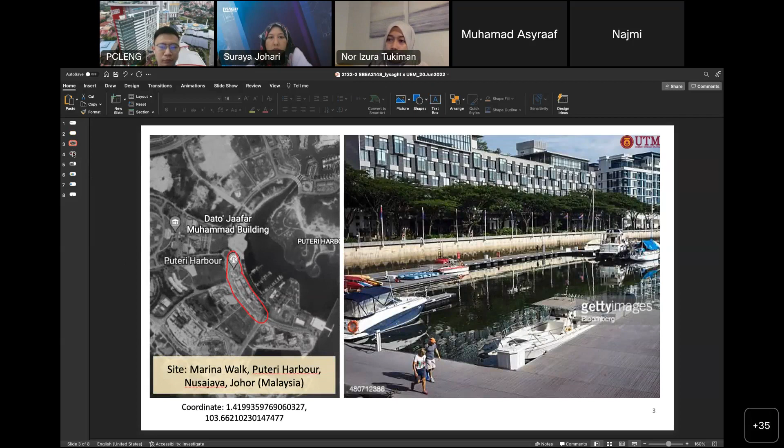And it also has this spacious paved walkway with all the big trees that I mentioned just now, and also some shops and sittings for the users to enjoy along this marina walk.

So basically the students are free to propose the location of their outdoor exhibition display along this marina walk. It's just a small project for the students to work out, and this is the basic form given to the students as their reference.

One of the requirements of this outdoor exhibition display is that it should be easy to assemble and disassemble for future use. On top of that, we also shared this standard dimension of exhibition display with the students as reference.

So they are free to basically explore and experiment with the design within the size given here, and as long as the display does not exceed the size of 2050 millimeter height and 2400 millimeter width, it should be okay. As part of the outcome of their proposal, they also have to produce working drawings or detailed drawings in order to explain the ideas and materials selection.

And then we also provide some links from the Lysaght Asia website for them to refer to all the materials that are available in Lysaght. And also we share the YouTube link, which is from our webinar last time.

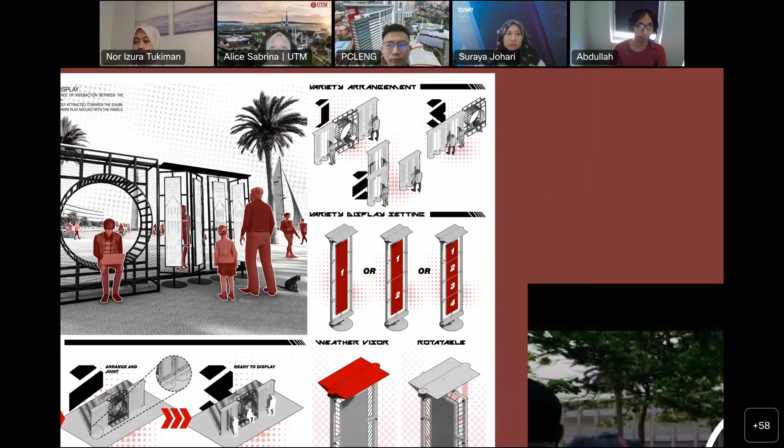So the design is very modular and flexible, with a variety of arrangements. This is arrangement 1, arrangement 2, and arrangement 3. The design is by unit, so you can mix and match it to create a variety of designs.

There's also a variety of display settings. The first design is one display, the second design is two displays, and the third design is four displays.

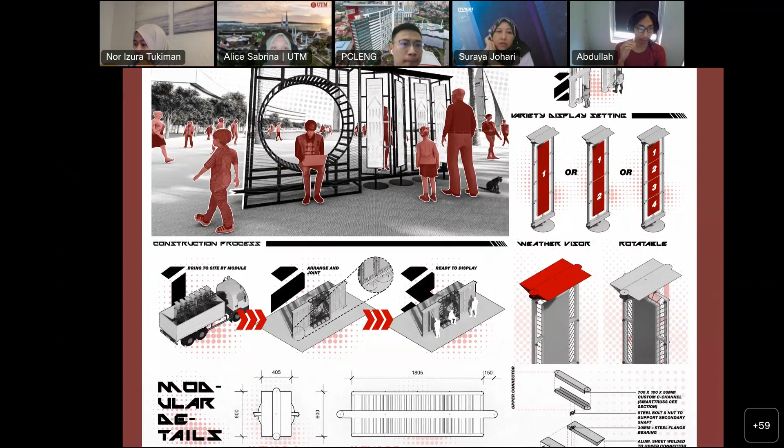For the construction process, every unit is already assembled at the factory. You can bring each unit, each display, to the site by module, then arrange and join it together, and it's ready to display. So it's a very straightforward construction.

The components include a weather visor, and it's also rotatable. The goal, as I said earlier, is to let the user interact with this display. By creating it as a rotatable display, we hope to let the user interact more with it.

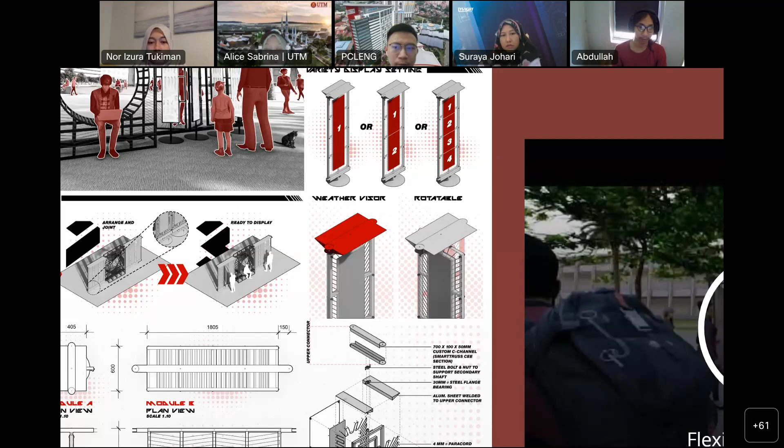Next, for the construction, I'll let my friend Rasyid present. Rasyid? Hello, can you hear me?

Yes. For the construction, the thickness of each panel is basically about 2 feet for the rotating panel. There are two types of connectors holding the panel, between the middle panel and the side panel. Can you go to the exploded structure, Lola?

The upper part is a custom C channel that will hold the structure to its partner. It's assembled using bolt and nut from the structure to what we call the connector at the side.

There's a steel flange bearing that holds the rotating panel, because steel flange bearing can hold the structure well since it is light enough. There's also an aluminum sheet welded to the upper connector that holds the frames.

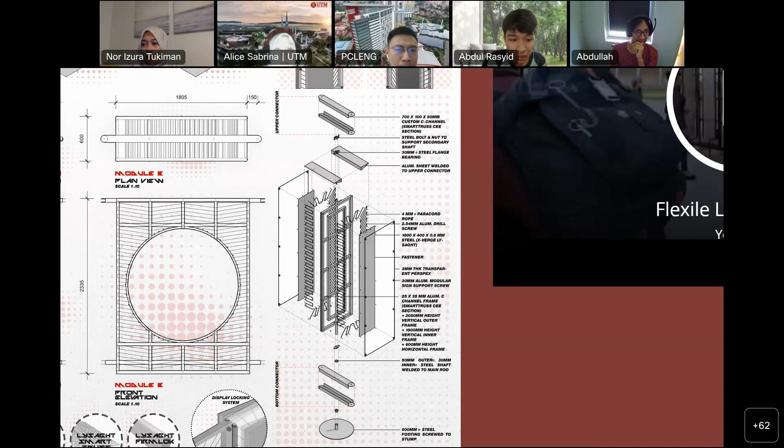Can I play a very short video for the panels to understand the design better? Sure, sure.

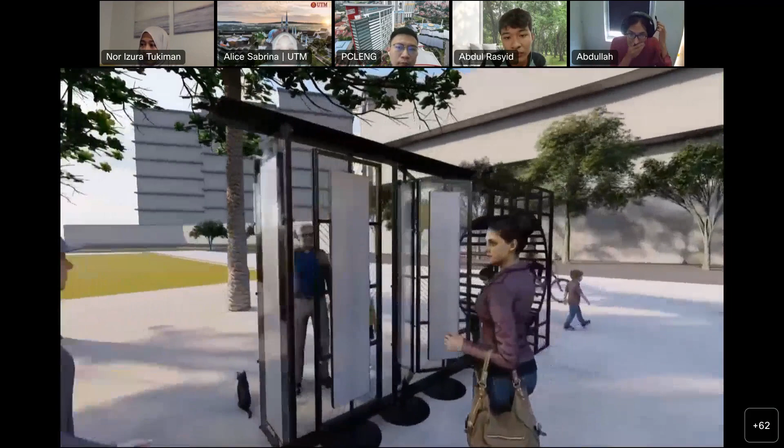Okay, I think that's all from us. Thank you very much, Abdullah, Rasyid, and the team. May I invite Madam Suraya to give some feedback or comments?

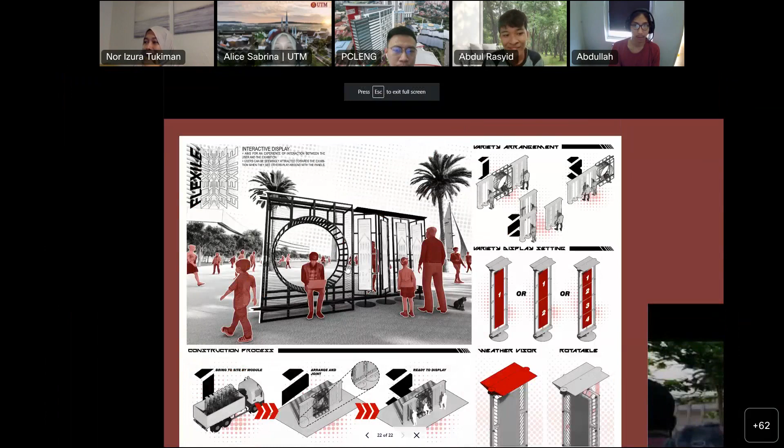First of all, good presentation. But can I know what your group is trying to solve here? Do you have any problem that you want to solve from your design? In terms of construction, is it? No, your concept.

I believe from the background that this research is to provide some facilities to the users, right? So are you trying to add more facilities? For example, you can see here, you can sit there and do your work. Is your design just to add some features, some hardscape to the environment here, or to try to solve any problems at this location?

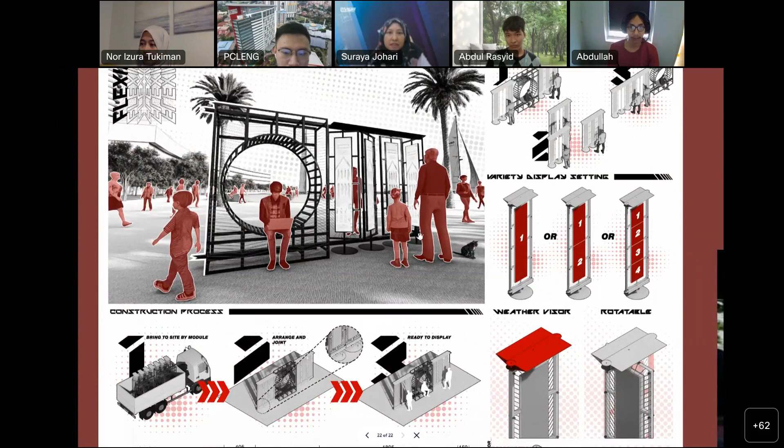When you talk about durability, have you studied how long? Because every product manufacturer has their own durability lifespan.

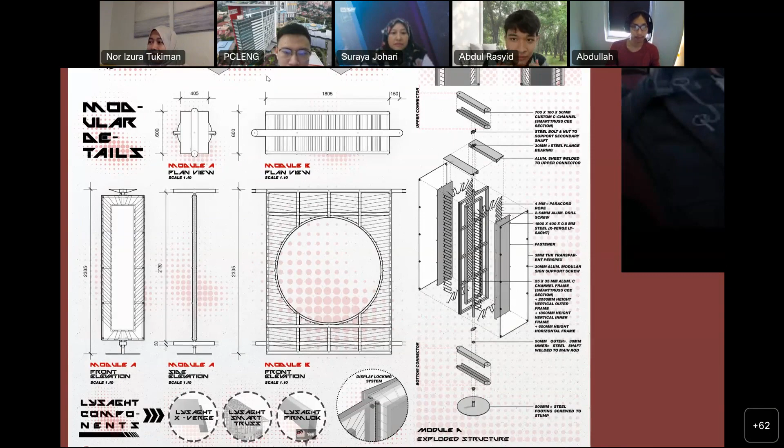Okay, thank you, Puan Suraya. Thank you very much, Madam Suraya. I think it's a very useful comment for the students, and hopefully the students will take note of all the aspects that have been highlighted for you to develop your design further.

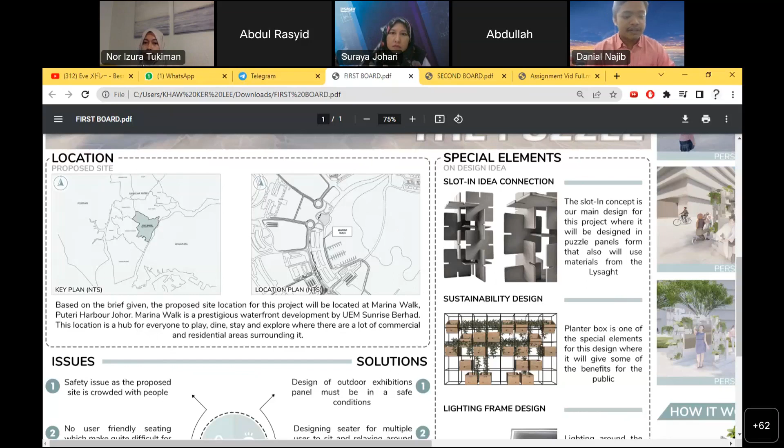So moving on to the issues and solutions on how to counter them. The first is safety issues, as the proposed site is crowded with people. The second is there are no user-friendly seatings, as the only seating area is limited to the benches and the side of the pier, which would be dangerous. The third would be bad odors caused by trash thrown around that has been neglected.

So the solutions for those three are: the first is that the design of outdoor exhibition panels must be in a safe condition so that it will not cause harm to other people. The second is designing a seater for multiple people to sit and relax around the marina walk. The third is placing planter boxes into the design to give fresh air and a sense of sustainability to the project.

So for our design concept, we took into account that Iskandar Puteri itself is like a big main board for a puzzle, an empty puzzle where you need to solve it, like those puzzle games. And Puteri Harbour is like the main development, the big puzzle piece for the board itself.

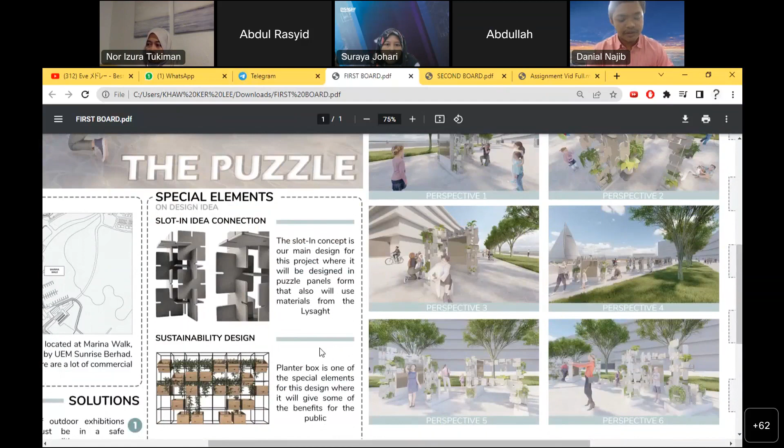Yes, okay, so moving on will be our special elements, which include the slot-in idea connections for the puzzles, done using Lysaght materials. The sustainable design is the planter boxes, and the third is a lighting frame design which will illuminate the display area to create a lighting effect and attract people to read it. Then moving on will be the design process.

So we took the design process from the sentence 'Marina Walk', where we play with perspective: from one view you can read 'Marina', and from another view you can read 'Walk'. That can be played around as a perspective and a way to attract people to our design. We first took the letter M and made it easy enough to construct, making it a bit blocky.

And also easy to construct. Then we changed it, applying some of the elements we had identified before, making it easier to read from one perspective. After that, we changed the base shape into puzzle panels so that it would be the main concept for the project.

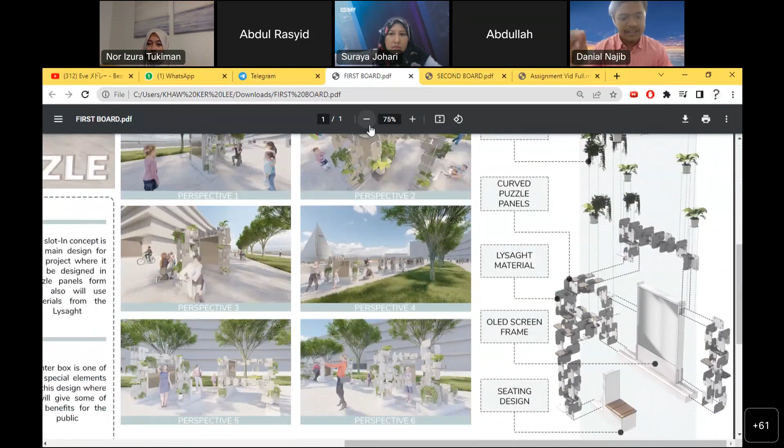Moving on will be the perspective renders and exploded axonometric, to see in detail how we constructed it, where the seating design is at the base with the OLED screen frames on the side of the design, in order to not block out the letters of the M, the A's, and such.

And then the curved puzzle panels, in order to resolve that safety issue. Also the planter boxes, which we put on top of the curved puzzle panels. Moving on would be...

How it works: the planter boxes act as the sustainable design, and the design seat is combined directly into the design to help the public take a rest while also being able to read the display on the left and right. The puzzle panels' main shape will be curved for safety, and the lighting will provide good illumination.

So moving on will be the second board, which will be our drawing.

You can see from the plan view and the elevations. On the front elevation, you can distinctly see the letter M. We tried to do that for the other letters, the A and the R's, and such, where you can also see the word 'walk' on the right side of the design itself.

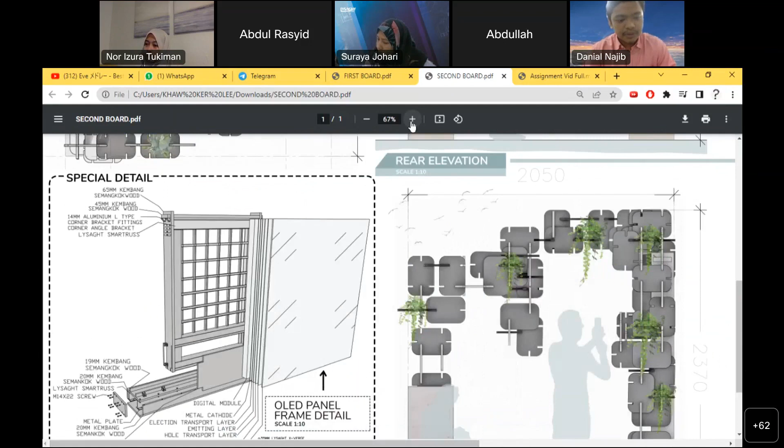And then after that will be the details. For details, we put two: the OLED panels, the frame details, where we use more wood, and also the Lysaght materials, using smart trusses. And then there will be wiring, screws, and so on.

After that, there are the puzzle panels, where we use wood in the middle of the panel and also Lysaght X-verge, all put together by screws. When slotting in, there will also be brackets, in order to not make it fall apart easily.

So next up will be our video of how this design was actually done from beginning to end. Enjoy.

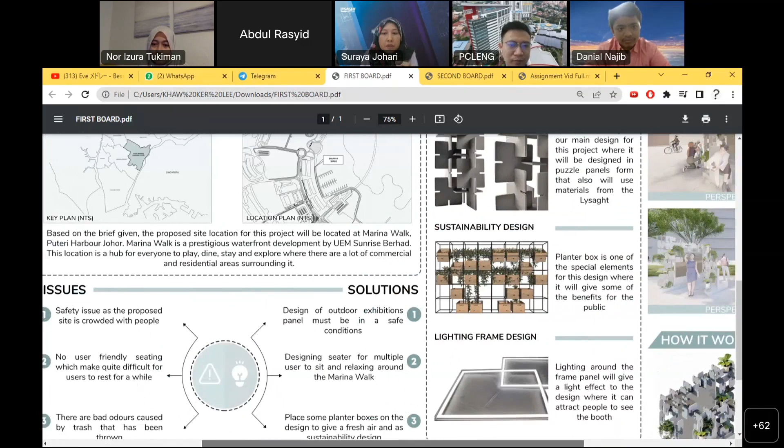I want to know how you are going to construct this, the material that they are using for the planter box. You have a planter box, and then you have your seating, you have display. Why are you choosing all these materials? The main factors affecting your material.

Are you saying something? That point will be given by one of my team members, Balkis. Why we choose the material, kembang semangkok wood, because it has good density, and also it is easy to resaw and crosscut despite its reputation as a difficult timber to process. It also has natural durability - the timber is moderately durable under exposed conditions.

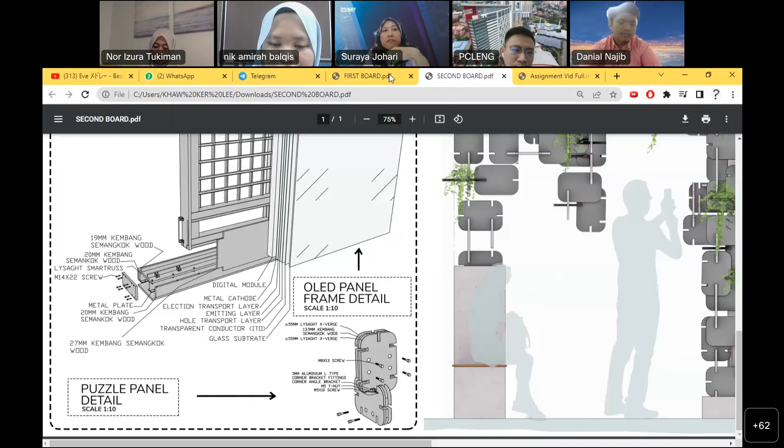My concern is about safety. It's good that you have the idea to conceal the wiring into this C section so it can be covered up. But in terms of maintenance and safety during rainy days, we need to ensure the wiring won't trip, and also how difficult it would be to maintain this wiring.

And then, for all these small panels, what kind of information do you intend to have displayed?

Is it just panels for decoration, or are you going to have some information on it? Hello, Madam, other than Suraya... planter box?

Hello. Yeah, okay, all right. So can I add on something? Sure. Our initial idea is we have two elevations, front and back elevation. We have the panel with the same color, but different material of Lysaght Bluescope materials. And at the right side and left side, we have another color, but also different material of Lysaght Bluescope materials.

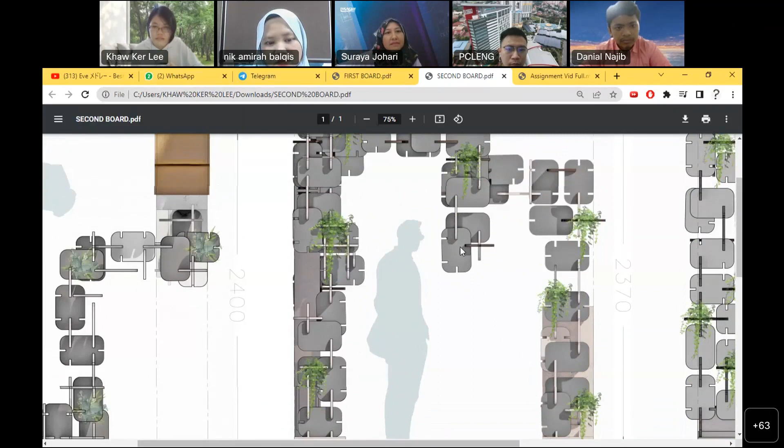It's okay, all right. I think you have a good design, but if you can add some informative articles, other than our products, it would be more meaningful. Okay, so...

The conclusion for this second idea presentation: please have a look at the safety in terms of the wiring, and also the informative things you can develop into your design, because your design is, to me, very good, very interesting.

The thing is, if I go to this park or walk through this lane, I need to go further to see your letters. If I stand about 1 feet from this display, I can see this letter. So how are you going to tell people that this is actually an M, for example, because of course I need to step further away to see the overall letter?

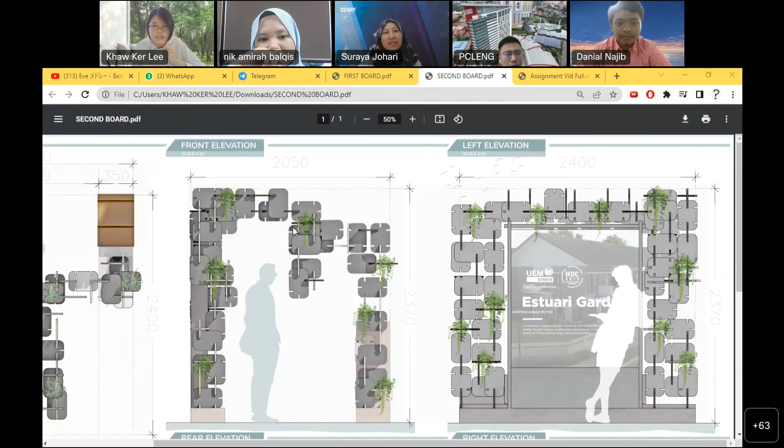Okay? All right, madam, I think we can use color to highlight it, right? Yes, maybe. Madam, can I ask another question? For the display screen, is it possible to use solar panels for the display? Is it possible, or do we still need to think about how the wiring connects?

Even with a solar panel, you need something. Solar panel is doable also. Yeah, but what for? Why do you want that solar panel in this design? We didn't want to have the transfer wiring for the power. Okay, you're collecting the solar, yes, but what for? Are you trying to generate something?

Are you trying to generate the energy for the display? Yeah, okay, because the wiring is very difficult to think about for that. I'm not saying it is impossible to do it, just you have to think about how to properly protect it.

Okay, all right. Thank you, madam. I think we still need further development. Sure, okay. Thank you, madam. Thank you, madam. Right, thank you, students, and thank you, Madam Suraya. Okay, shall we move to the third one?

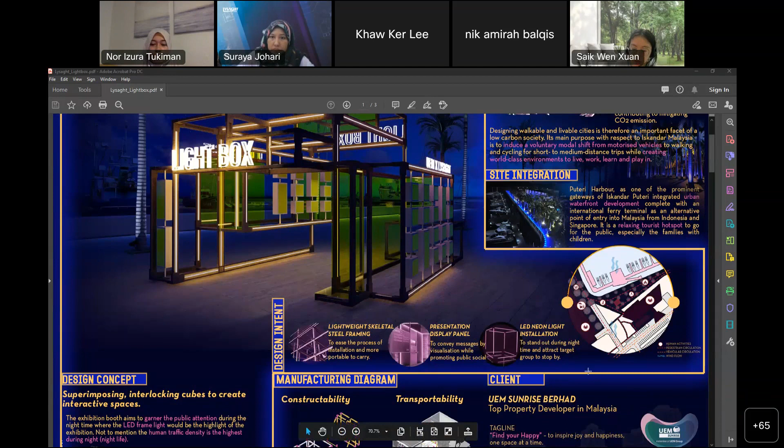The design intent for this Light Box comes from three main elements: the lightweight skeletal steel framing, which eases the installation process and makes it more portable to carry; a menu presentation display panel to convey the message through visualization while promoting public social interaction; and the LED neon light installation so it can stand out at night and attract the target group to stop by and appreciate the structure.

So what is the design concept? The design concept uses superimposing and interlocking cubes to create an interactive space. This exhibition booth aims to garner public attention during the night time, where the LED frame light will be the highlight of this exhibition, given that human traffic density is highest at night.

The concept of modularity provides flexibility and creates diverse configurations. This is just one module, which has a lot of possibilities for the future. It may seem bigger compared to other groups because we have a main frame with many possibilities for creating a variety of shapes and combinations.

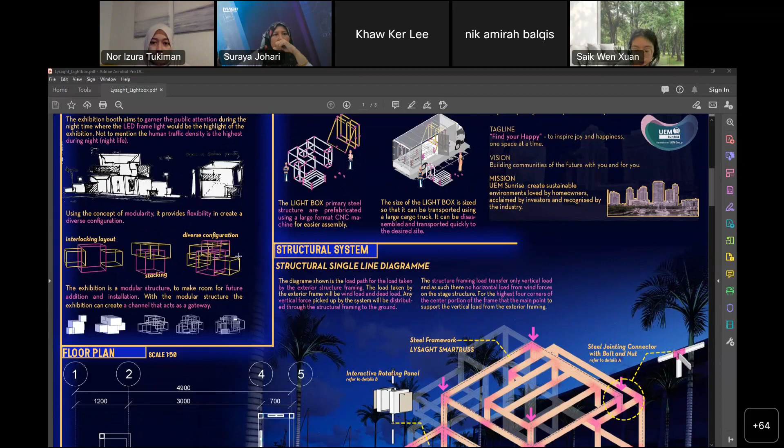We use an interlocking layout and stacking effect to create diverse configurations. The exhibition is a modular structure, making room for future additions and installations, and it can create a channel that acts as a gateway—like the concept of Lego, where stacking up all the cubes creates a gateway structure.

Looking at this floor plan, you can see the walkway is about 3 meters. It's 3 meters because we want the place to be comfortable for people—when someone is standing beside it reading the information panel, there's still space for people to walk by.

Besides the walkway, there will be interactive spaces, which are also a highlight—this interactive rotating panel. I will explain this further in the poster.

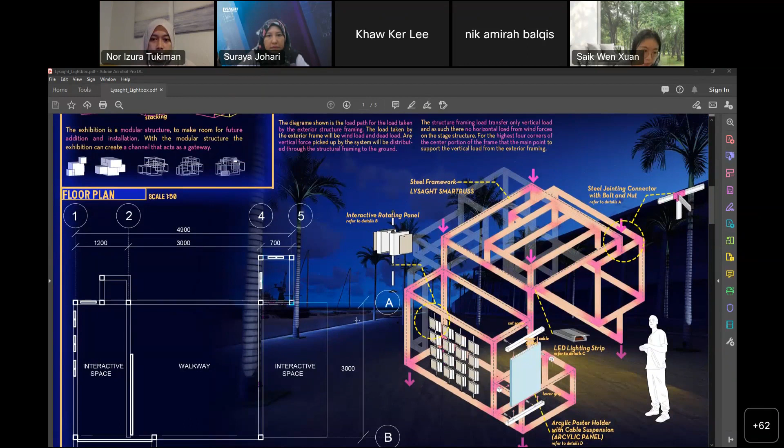So how is the manufacturing diagram done? Firstly, in terms of constructability, the Light Box primary steel structure fabricated using a large format CNC machine for easier assembly.

Secondly, regarding how it can be transported and its size: it can be transported using a large cargo truck, and it can be disassembled and transported quickly to the desired site.

So how about the structural system? This diagram shows the structural single line diagram, showing the load path for the load taken by the exterior structural framing. The load taken by the exterior frame will be the wind load and the dead load, as shown by the arrows here.

The vertical force picked up by the system is distributed through the structural framing to the ground. The structural framing transfers only vertical load, as we have removed the horizontal load from the wind force on the stage structure. The highest four corners of the center portion of the frame will be the main points supporting the vertical load from the exterior framing.

Okay, so our structure will be 4 highlighted details. First, we are using the steel framework. We are using the Lysaght Smart Truss, and a connector with bolts and nuts, and we will refer to detail A in the poster later.

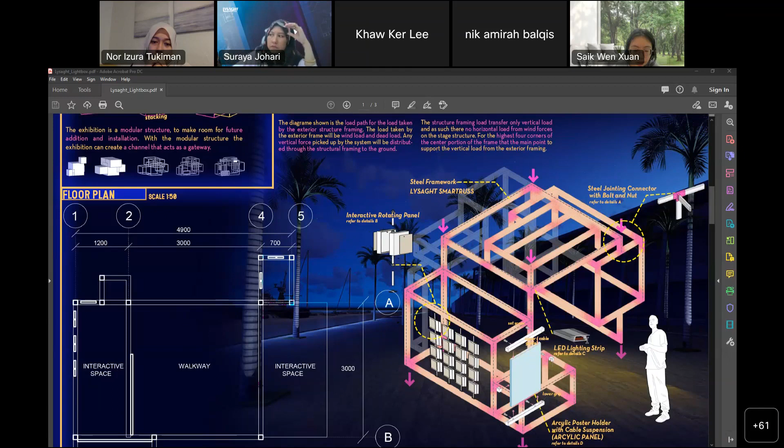Thirdly, the focus will be the LED lighting strip, because we want to integrate well with the surroundings. The LED is a main highlight, so it can function and be a highlight at night to attract people to the structure. It's connected by suspension - how did we connect with the structure? And the poster and information are placed inside the acrylic panel.

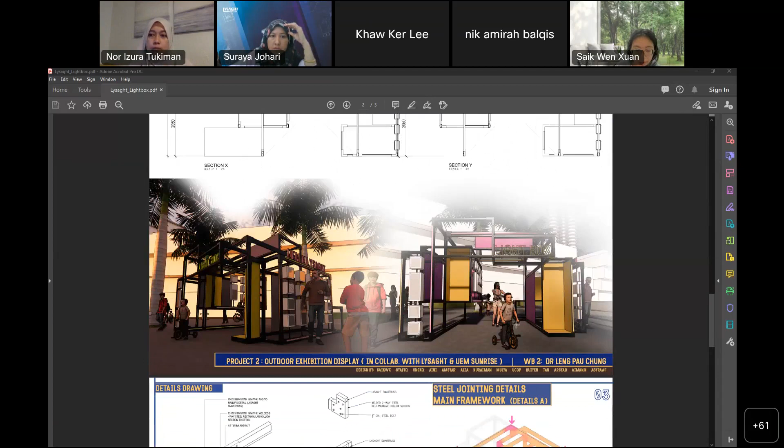During afternoon or morning, you can see this was especially made for the interaction of the children and of the public.

So for the details drawing, detail A will be the steel jointing details. We are using the Lysaght Smart Truss as the main structure. For the connection, we are using bolts and nuts with connectors, connected with steel bolts - you can see the details here. There are a lot of different types of jointing, but still using the same type of connection, the bolt and nut, and using welded connections.

Okay, so second will be the pivot structure details, which is for the interactive rotation panel. So this is the detail. We are using 6mm acrylic perspex for the informative poster inside, and it can be rotated to 2 sides. It is supported by a steel round tube.

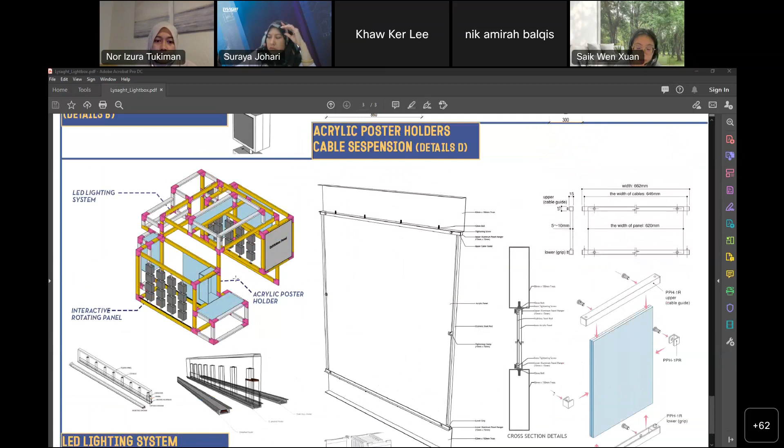This overall diagram shows how not all of the structure has LED, but we have selected some portions that link the LEDs together, creating an interlocking effect and visual for the public. So you can see here how the LED will be placed - we're having the idea to put the LED strip at the C channel, covered by a plastic panel, something like this.

And we will connect it all to a box, and it will be hidden in some way for safety reasons. Yeah, so the last detail will be the acrylic poster holder.

So how it is connected to the steel is by using the cable suspension. This is some of the details - these are the trusses. And then the cable suspension holds the panel itself, so the information poster can be inserted between this acrylic panel. I think that's all for our presentation. Thank you.

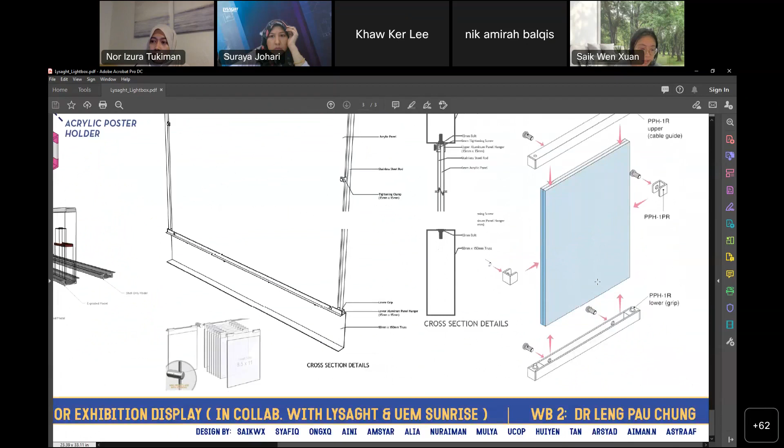Right. Thank you so much, again very good presentation. You highlighted the low carbon society blueprint and so on, you addressed it well. Okay, and the first thing that I would like to do is congratulate you.

It's a good job in presenting the load path. You have the dead load and live load, how it's being transferred.

Okay, maybe I missed out just now. Can you explain to me why you chose a roofing structure without a roof for your design? Without roofing? Okay, right, no roof at all?

Firstly, from my point of view, why we are not having any roofing is because this structure's main intention is just to create interactive spaces and display booths for others. This is not our main intention to provide shading or shelter to people. We just want the structure to be connected like a gateway, more like a structure to appreciate, creating a place to attract people to come. So for the roofing, it is not our main intention, because we don't intend for people to sit inside and rest, but instead we just want people to walk by.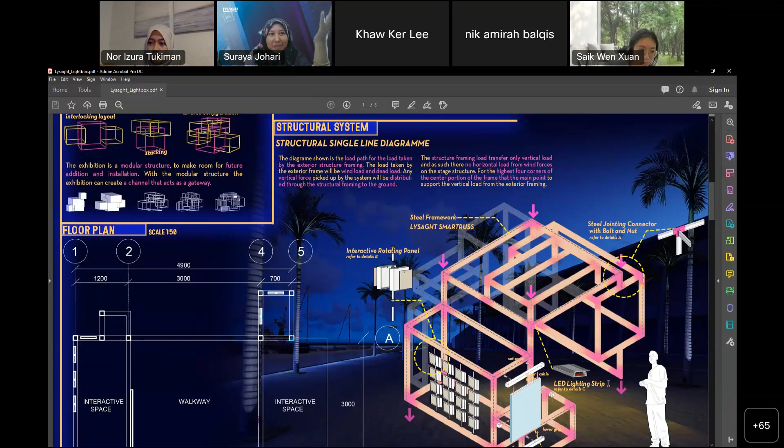All right, so with our weather we have hot sun and rainy days. You have a lot of things to display, a lot of things to attract people to be there and browse through your information. Do you think people would like to go there without any shade? How are you going to attract people? We know that people will feel uncomfortable with the hot sun, so how do you attract people to go to your display area and let them browse and enjoy the information you are providing here?

Put simply, when you are waiting for a bus, how long can you stand there to wait for your bus without shelter?

Understand. Okay, maybe this is a suggestion: the purpose of the roofing is not only for shelter, but also can be additional maintenance protection. You can add it since you have a lot of connections, so maybe you can use this to minimize the maintenance requirement.

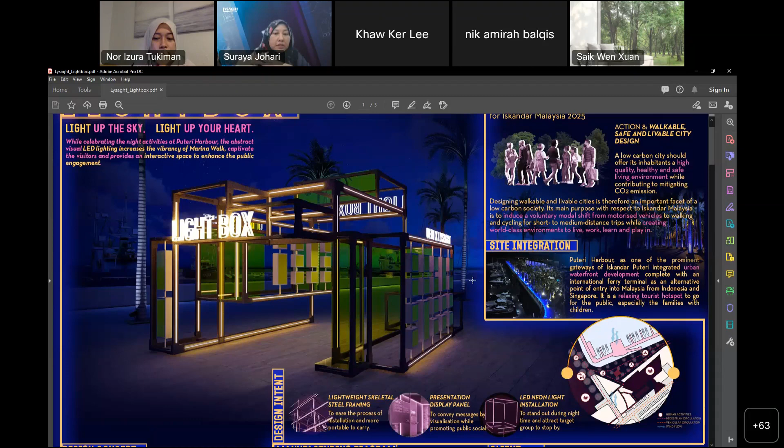Okay, and then just now you were saying that you have welding connections, right? Which part requires welding connection? Because most of our product components, the truss component, the roofing, the thickness is only up to 1.2, so it's impossible to have welding connection. So I would like to know which part you are going to apply welded connection.

Sorry, let me go through the details. For the welded connection, is it necessary if we are having connectors for the steel? Is it necessary if we're having bolt and nut, so it's not necessary to weld together? That's why I'm asking about your proposal for welded connection, can I know which part has that welded connection? Oh, maybe at the ground, maybe the base plate. But if we can avoid it, then avoid it, because the base plate is the main connection to the ground.

That side might be okay, but I have to look at your main components. Your main components are actually C channel as well, right? Yes. So if it's channel, we don't have that welded connection, because welding is not suitable for thin wall plate.

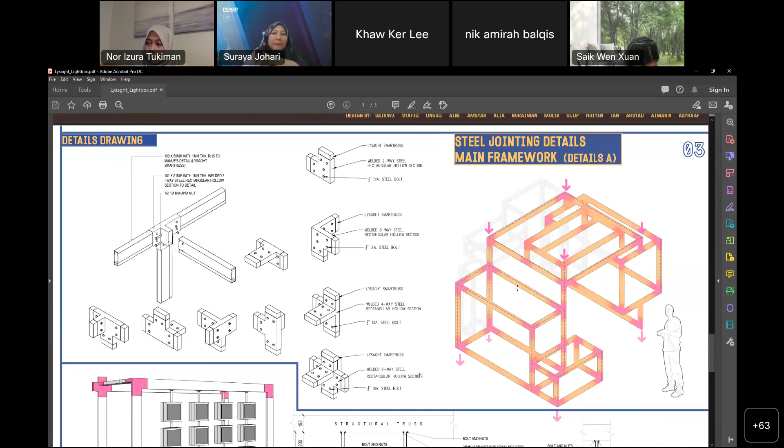I see, all right. And the connection you are creating now, do you have an idea how to connect between the junction and everything? Maybe we can have another discussion to have a simplified connection, and also the spacing of your studs, the spacing of your vertical members, and so on.

Again, my general comment would be, since this is a public space open to everyone, what is your prevention for vandalism and for safety? I guess you need to improve on that as well. All right, thank you, madam.

And for acrylic materials, we use acrylic a lot, and we found that acrylic tends to fade earlier. So how are you going to overcome this? For the acrylic panel, is it? The one that we have is actually indoor. Even indoor, it's easily faded. We can see signs of fading about 1 or 2 years in, and it affects the material sandwiched between the acrylic. We can see discoloration on the panel itself.

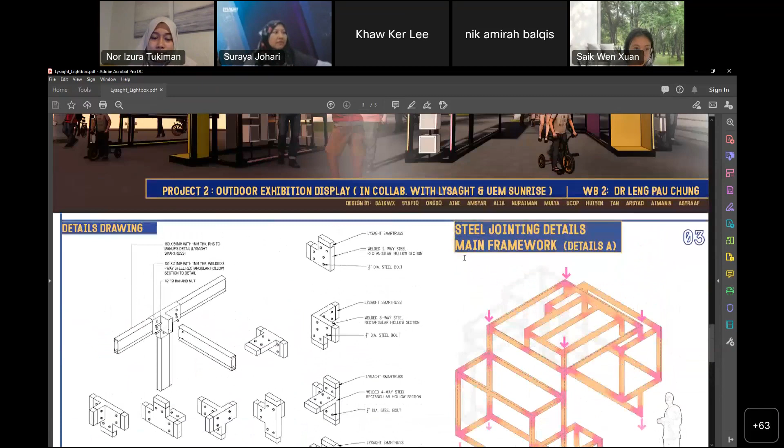Hi madam, can you hear me? Yes. Hello, I would like to explain about the welded part now. Actually the welded part is only at the jointing connector. So the main structure, which is the Smartruss, just slots into the rectangular hollow section, and is secured with bolt and nut. I think that's all from me.

Oh okay, so you are building a connection, constructing a connection there - welded 3-way steel rectangular, wow. Yes. You're using hollow? Rectangular. Initially we were thinking of using Lysaght materials of the firm lock, but we heard that it's not available in Malaysia, so we changed into these C channel materials. Okay, good idea to have this considered, a socket for all the junctions.

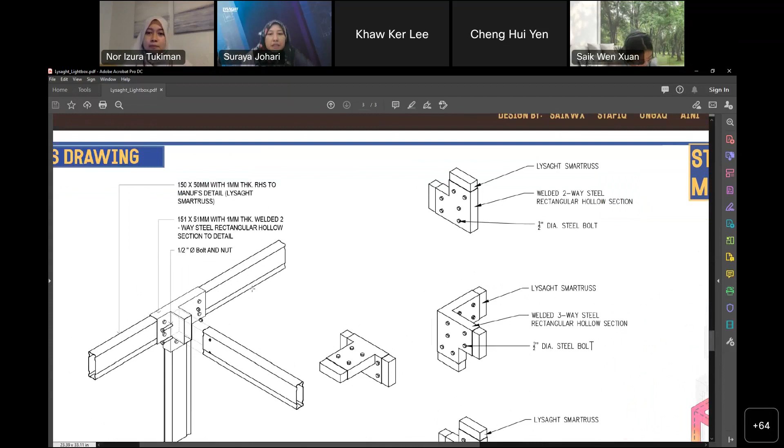Okay good, but if we have a simplified connection, I think we can avoid unnecessary work - for example, having a new socket for this connection. But honestly this is a very good idea because you are solving the connection problems here. Right? Okay, thank you madam.

Any other questions from your group, Wen Xuan? Yeah, any others? Just one more - just want to ask, what is the maximum span for the length if we are using these Lysaght materials for the Smartruss. Is it possible for this to be 3 meters, or where is it?

Oh sorry, here - not possible. Not possible, you mean? So you have decreased the length? Decrease the length, or you provide internal support - for example, maybe you can add on vertical members in between the span, so that vertical members can be part of your display unit later for the rotating acrylic.

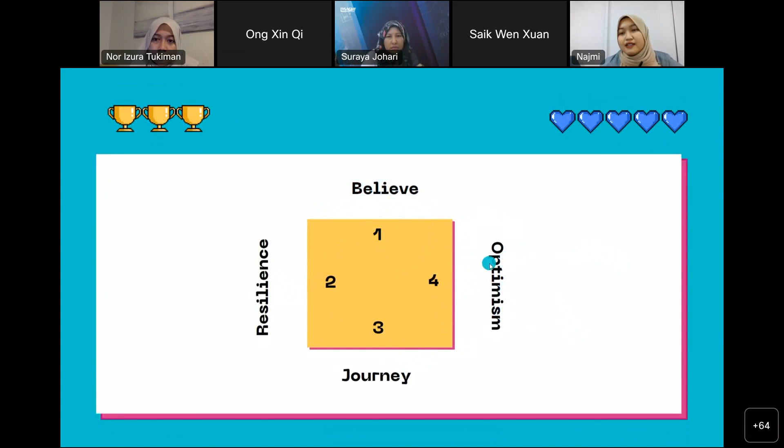For the ideation, we are actually inspired by UEM Sunrise's slogan, 'Find Your Happy.' In the tagline, they have a few elements of happiness, which are: first, signifying belief; second, resilience, journey, and optimism. This is from the UEM slogan. So what else has four sides? That is a pixel. So this becomes our concept, Find Your Pixel.

Pixel is the basic component of our exhibition display, and this pixel is a modular and movable component which enables users to create their own element of happiness. Like we mentioned, UEM has their own element of happiness, and for our exhibition display, we let users assemble the pixels according to their likings.

For our design objective, we intend to design an interactive pixel display with push and pull movement, some extrusion in our design, and a personalization option. It is a modular design that can be personalized and easy to assemble, something like a Lego. We are able to push and pull the pixels from the structure.

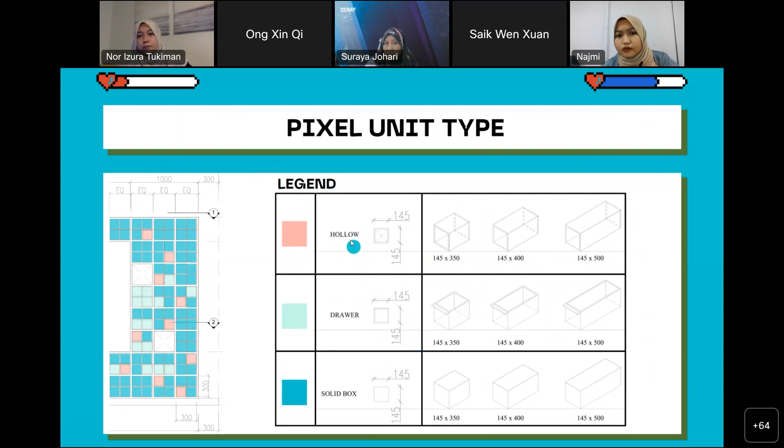The dimensions are as such: 145 by 350, 145 by 400, and 145 by 500. Each type has similar sizes, just different details. For the drawers, we can use them to put brochures, as well as the hollows.

So about the different sizes of the pixel units, we can create the extruded look. From this first plan, we covered the top with Lysaght panel, and then this is again the pixel box, and also this is the base. The second plan shows the section in the middle to show how the LED sits between the pixels.

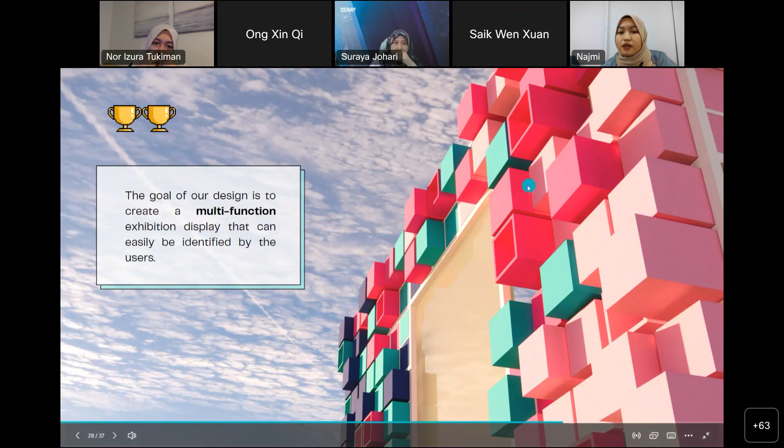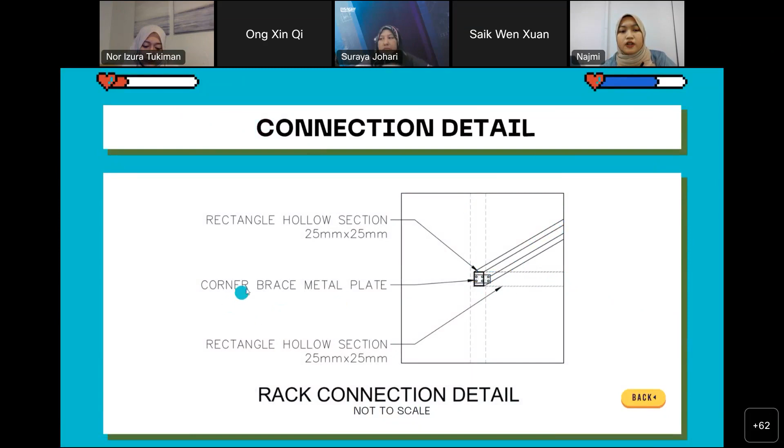Let's see. The next one is the rack connection detail, for the corner connection. We are using a corner brace metal plate. Very simple structure.

Just only a steel plate that is connected by tanggam.

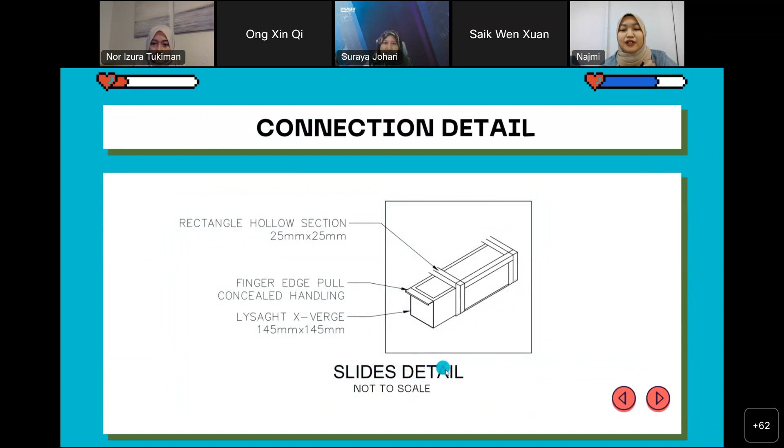Okay, lastly is the sliding detail. Like we mentioned, we have some push and pull things happening in our exhibition. So this is a finger edge pull conceal handle for users to push and pull the box to take out the brochures and everything.

Okay, I guess that's all for the presentation. We can proceed to the input, feedback, I guess. Okay.

Thank you, I already put my attention to your design. One problem with me is if I'm touching the X-Verge panel to pull out the box, would it be very hot? It will be very hot. So how, if I am the user, how am I going to pull that? Because that's the main problem, that I won't touch it because I know it is metal, and metal will absorb heat very fast.

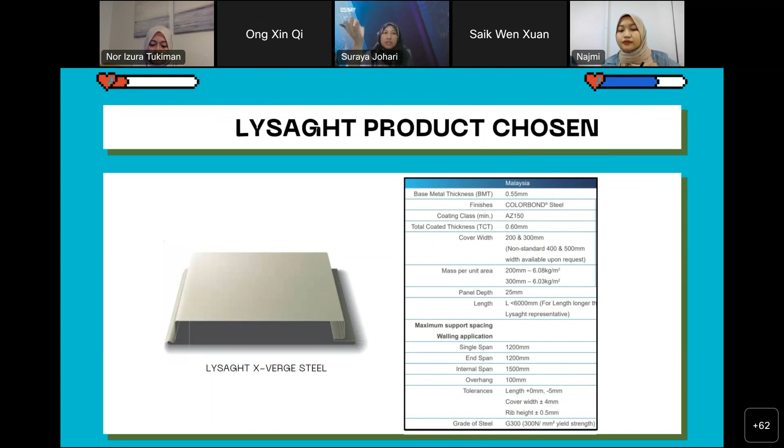Would you mind changing the handle to another product or other material? Because I think there's no issue for that. We can just please look for users' comfort. Yeah, because it's for sure with your exposed display unit, this material will easily absorb heat very fast.

And why did you choose your structure using mild steel? You are going to use a hollow section, right? Yeah, so the hollow will be fabricated using what kind of material? The main structure. Steel RHS, so it is mild steel, right? Yes, true. So why did you choose mild steel instead of using cold form C-channel?

Hello, okay, yep. For that question, we just wanted to use steel for our main structure. Any reason for that?

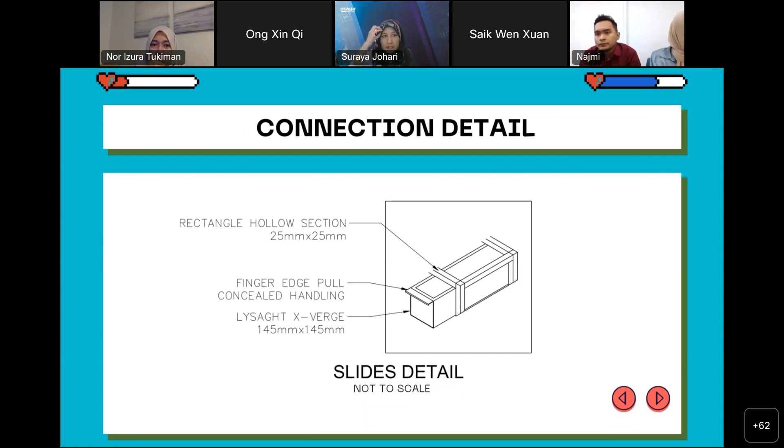So what is your concern actually? The stability, the strength of the materials? Yes, and also the looks of the overall design. Okay, by using cold form, you can achieve your desired looks, your desired design. We actually already considered the C-channel form.

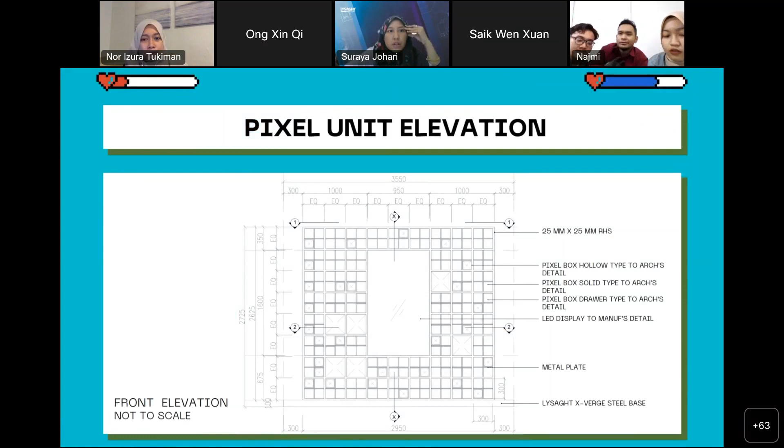Yes, what about the base? You're only using this X-Verge for the base. It is actually a concealed structure, the Lysaght is part of the structure for the base. So the base will be folded? No, not folded.

So basically the view from the plan is that we put the Lysaght material on top of the base for the Lysaght X-Verge, not on the sides. On the elevation, that is covered, just to indicate that we use Lysaght X-Verge. All right, so you will cover the entire ground area with the X-Verge. Yes, because the X-Verge has a connection, a seamless connection, so I think it's appropriate to use it like that.

All right, so people will stand on that area, right, on the X-Verge? No, it's not to be stepped on, it's more for holding the structure on top.

Okay, what is your arm length? Is it reachable if I stand one meter out? And how about kids, a bit shorter? There's no way you can prevent people from stepping on the ground area.

So I suggest you consider different materials, because it's very flat. I see, if it's rainy season and there's water, this could chain up problems.

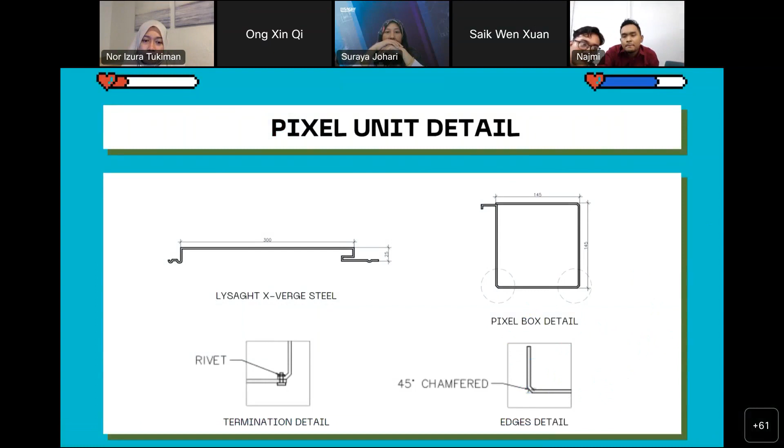Should we consider just how you are going to fillet this, bend this to make it a box? How are you going to fabricate this shape? By bending it.

Okay, so then what is the rivet for? The rivet is for terminating the endings of the pixel box detail. So we considered using a flush rivet, which will not disrupt the flow of the drawer, so it'll be smooth when pulled.

Oh okay, all right. But I think the lapping area is not sufficient, it's just barely enough, I think you need to enlarge it a bit. I see, okay, we need to enlarge it a bit. Okay.

For the entire box we'll be using X-Verge... Can you consider, because we have a lot of profiles, maybe using a few profiles instead of just one profile for your box? Yes, because we want to achieve that seamless look, so we only look for a profile that has a panel with a seamless profile. Okay, so you already have your scope. Okay, all right.

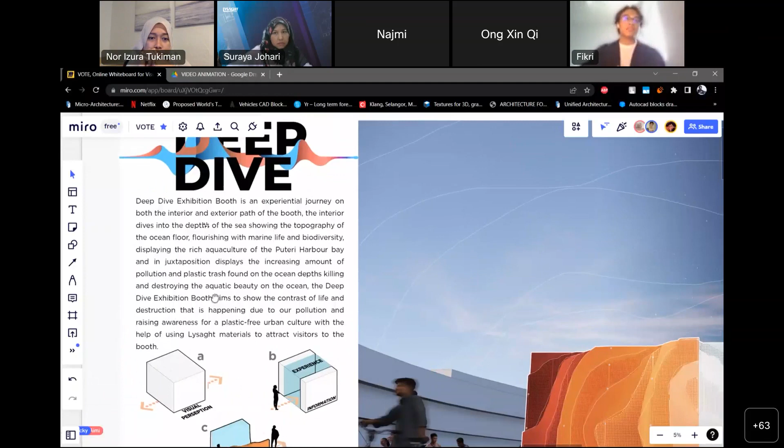The Deep Dive exhibitional booth is an experiential journey on both the interior and exterior parts of the booth. The interior will dive into the depths of the sea, showing the topography of the ocean, flourishing with marine life and biodiversity, displaying the rich aquaculture of Puteri Harbour Bay, and in juxtaposition, displays the increasing amount of pollution and plastic trash found in the ocean that's killing and destroying the aquatic beauty of the ocean.

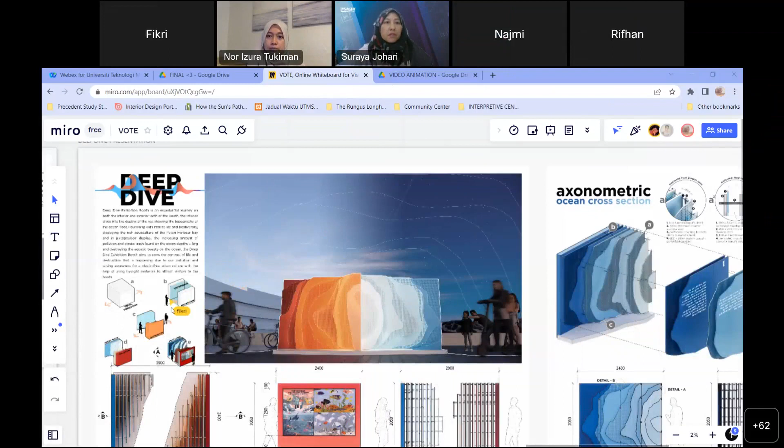Continue with the form idea. So after creating an experience through the past, we create a juxtaposition displaying contrast between the ocean floor and the amount of plastic on the boat.

So we show the render. In the render you can see one of the ways this exhibition contrasts the elements. So when you look at the floor plan, you can see the actual path and how it contrasts with the plastic pollution, so people can see how each element affects us.

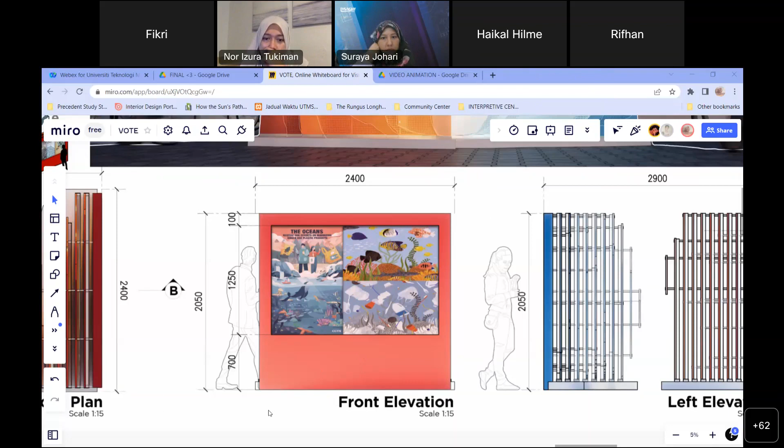So on the front elevation, you can see that we prepared a space for the display, an opportunity for poster displays to show awareness for plastic pollution. On the left elevation, the next one, you can see the intricate layers of each individual piece of the panel showing different depths of the ocean. So moving next, we go to the next section, Section A.

So section A is where you can see the topography of the ocean, showing the depths and detailed marine life and biodiversity on each level. On the other side is section B, where you can see the detail of each layer.

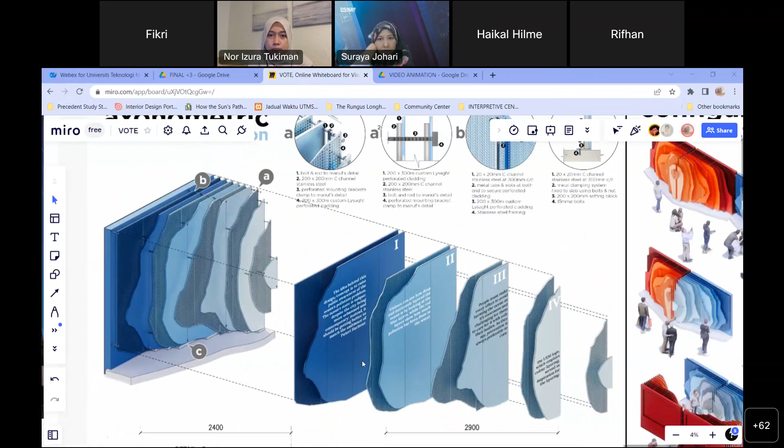When we look at the exploded axonometry of the ocean floor cross-section, it is displayed on every level what type of marine life exists on each and every level. So the idea behind this design is to raise public awareness for the ocean pollution problem.

The ocean state is subpar, and despite the city being more urbanized and contemporary, it should be getting better and match the ambience of the Puteri Harbour area.

Visitors can see how deep and intricately layered the ocean is by looking at the blue layers, while the red layer shows how much pollution has done to the water.

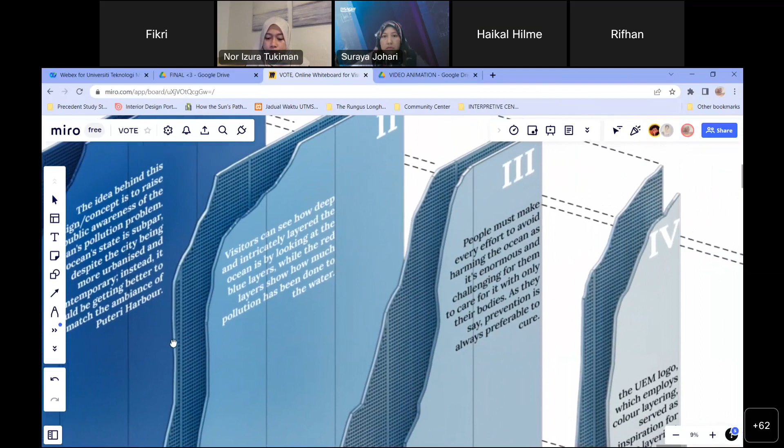People must take every effort to avoid harming the ocean. It is enormous and challenging for them to care for it with only their bodies. As they say, prevention is always preferable to the cure. The UEM logo, which employs color layering, serves as inspiration for the layering.

So we'll zoom out and go to the construction. First, the horizontal steel bracket joint. Each layer is made out of 200 by 300 Lysaght perforated panel cladding, connected to each other via bolt and rod.

Vertically supported via a 20 by 20 C-channel stainless steel, which is connected to the layer with metal tabs and slots.

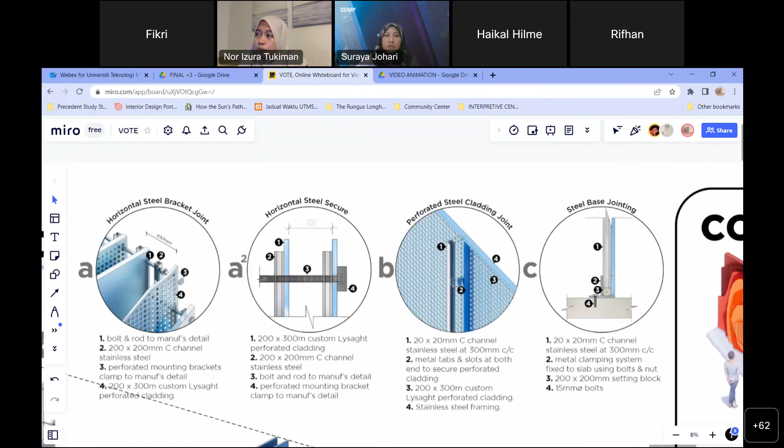Now we'll look at the configuration. The exhibition booth can be configured into different sets of arrangements to suit different events. It is a modular exhibition booth, so it is reusable for different types of events, making it have a lower carbon footprint.

Education-wise, by having the booth placed in a configuration that shows the best view and best readability, it allows passersby to learn and educate themselves on the ocean and pollution as they walk past or through the booth.

Experience-wise, this allows the exhibition booth to have various and unique experiences based on its many different configurations, to suit any event, space, human, or capacity of the area.

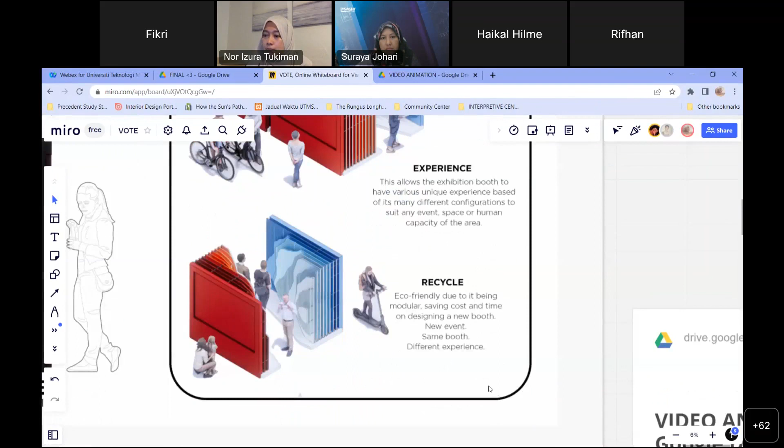It's also recyclable, due to being modular and saving costs and time on designing a new booth, so a new event can use the same booth but have a different experience. You can use the booth over and over again, but with different configurations.

Now we'll be looking at the video animation.

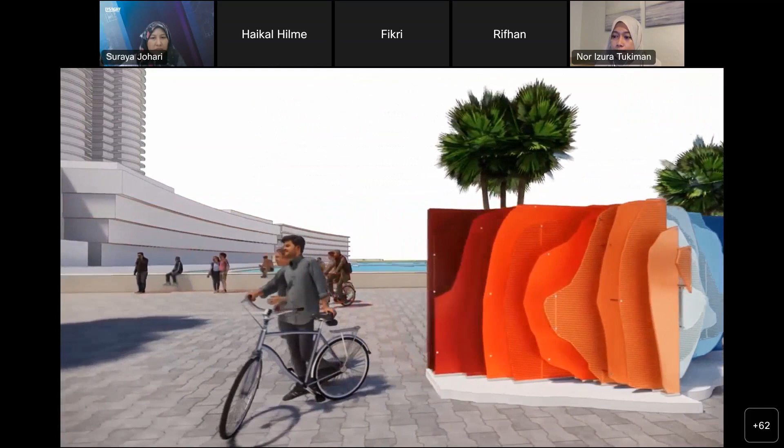That concludes my presentation for deep dive. All right, thank you.

I want to see your... you only have one drawing for the construction drawings. You have only one section, maybe.

Yes, because for the construction we focus on the jointings of the exhibition booth.

So again, for your first horizontal steel bracket joint, will it be just exposed like this, or will it be covered up? The jointings will be exposed.

I guess maybe you can provide some cover. Okay, right. Steel panel and the steel perforated mounting bracket.

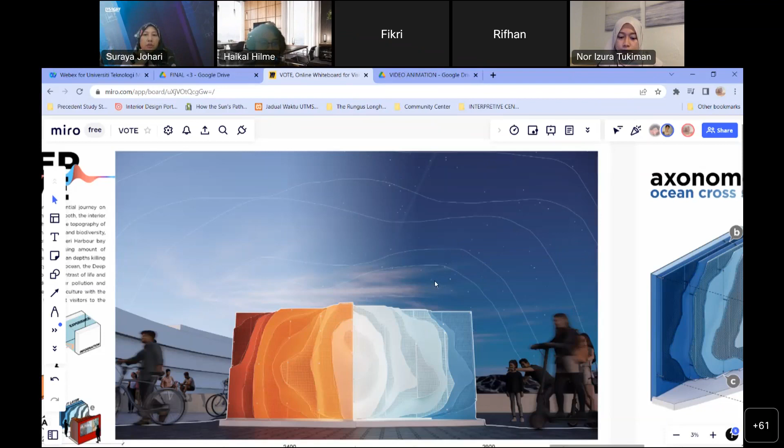All right, so if I am just an ordinary person passing through this display unit, how can I appreciate what you are trying to tell? So if you look at the configuration, the box configuration, the one below, yes, that one.

So when you pass through the exhibition booth, the left and right of your view is filled with the juxtaposition of the ocean floor and the plastic pollution. When you look to your left, you see the beauty of the ocean floor and marine life, but when you look to the right, you see how human pollution destroyed that beauty.

So as you go through this, it surrounds you in this experience. You are immersed in that story of life and pollution. So all that info will be—

Printed out on the wall? All that info will be etched using laser cut into the interior of the exhibition. So it'll be quite versatile, and on the outside layer we can also put posters or pictures of pollution, so people can see both on the interior and the exterior of the exhibition booth. There's a permanent and a temporary exhibition on both sides.

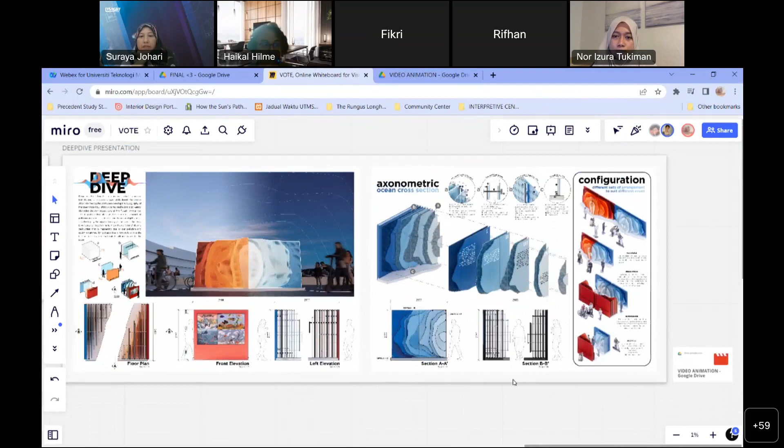Okay, can you zoom into your section BB or left elevation? Okay, how about section BB? All right, have you figured out what is the gap in between? How are you going to support the panel?

The panel is vertically supported using C channel, C20 by 20 stainless steel C channel. So that might be a bit small, but it's also horizontally supported by a bolt and rod, which provides the horizontal structural support.

You were saying you are going to use 20 by 20 C channel, yeah, C channel. I'm afraid you have to change the size, because we don't produce the channel with that size.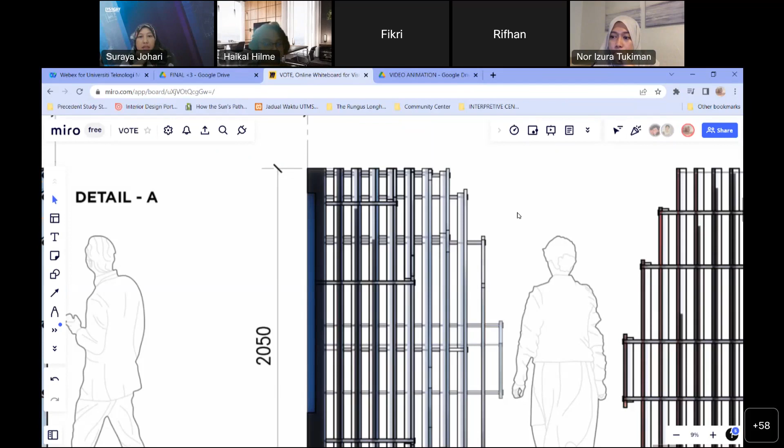I believe that in your section BB, you have your vertical members here. Okay, yeah, all these vertical members are going to use C channel. Yes, C channel.

So the one you said you were going to use 20 by 20 just now, I suggest to change to 75. 75, or 100, but check how big your panel is, whether the C75 with that spacing is able to hold your panel, because your panel is quite big—you have a variation of panel sizes, right?

Yeah, so we have to check it. You have this section BB only, but you don't have the other section so that we can see the rest—I can't see your panels or your C section arrangement actually.

I guess if we look above, yeah, you can see that on the right one. Okay, but this is for which size? Because you have a few, and each layer has different panel sizes. There's a variety of this C channel, so each panel is custom made to each vertical C channel.

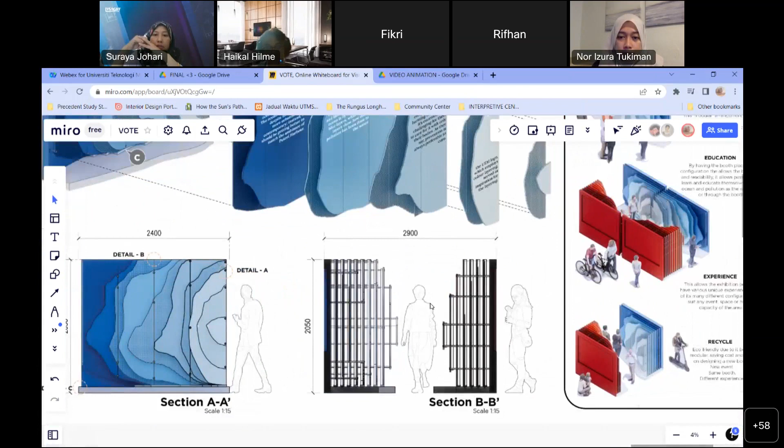So it's quite closely arranged, so all the load will transfer to that C channel. Okay, where can I see that, the 300? On the floor plan.

It's okay, never mind, so that means there's no details on that on it, lah. Yeah, you just need to extract it from your design.

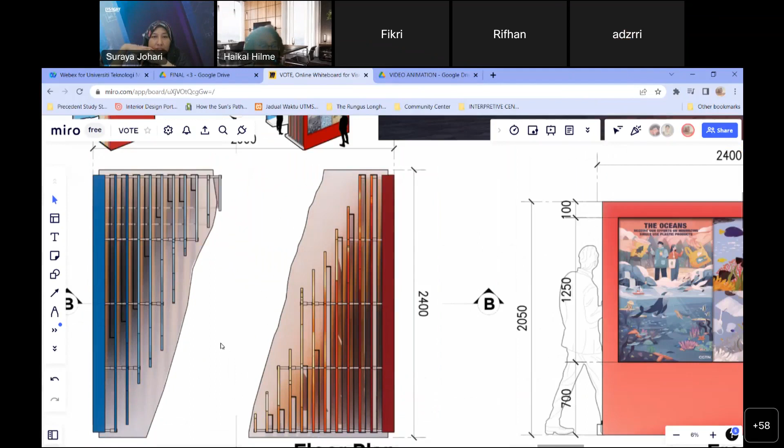Alright, excuse me, can I say something? Yes. Actually section AA shows the spacing between the panels. Where is section A? I need to bring it to section AA. Okay, this is section A.

Basically we're cutting it at 300 on the panels. As you can see, each vertical line there is actually 300mm. So you are following the width of the Lysaght, the panel itself, 300? Yeah, we're actually following the spacing given for the panels at 300mm, so we're using the vertical structure at 300mm also.

What type of profile are you using for this project—Lysaght or different profiles? It's just the same profile. We're using the perforated one, but the size is still the same, just the edges are a bit different.

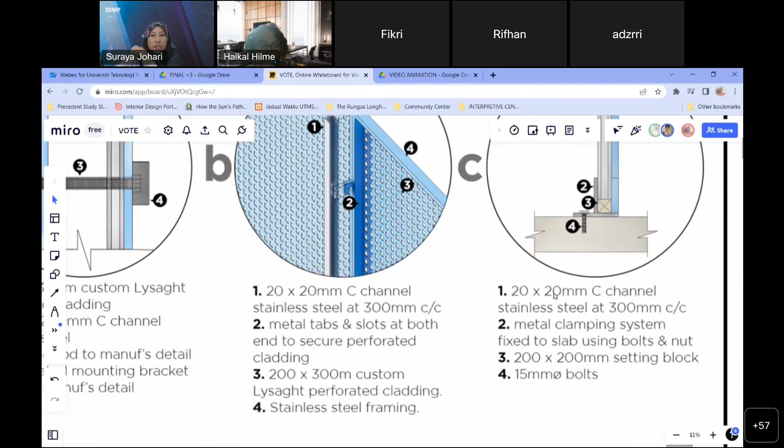But okay, go to A. So how many channels are you using? 200 by 200, and then here you have another. Let's see, you have 20 by 20. So a few sizes you are using. Yes, the different sizes.

All right, okay, so I have no more questions. Just I hope that you can try to standardize your C channel so that you can minimize the materials, to avoid the confusion. Just like what I experienced here, okay, you have 200 by 200, you have 20 by 20. If you are going to assign someone to install it, how are you going to identify, or how does the installer identify which part to be used at which area?

All right, and maybe you need more details on your construction drawings. Okay, some of the dimensions, the important dimension to me, okay, when I read your drawings, I need to understand what is your width, what is your support. As an engineer, I need to know whether the structure can hold your components or your materials or not. So I think you need to have more. It's not that your presentation is not good, just you're missing some important dimension here. Right? Okay, yeah, I understand.